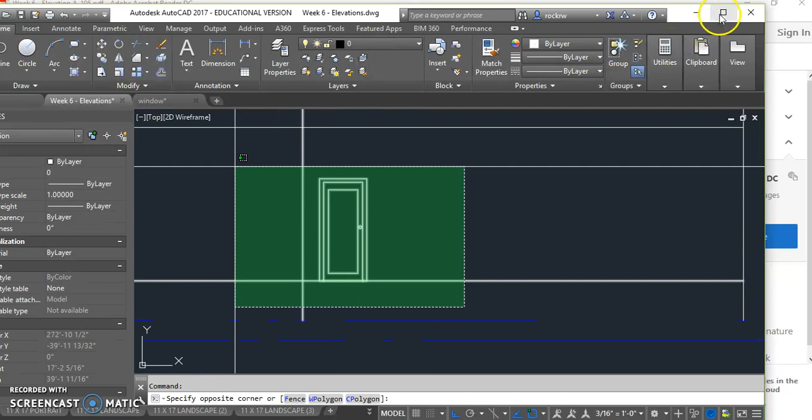I might copy my first floor line down 6 inches, and then another 1.5 inches for decking, and trim that out of this side.

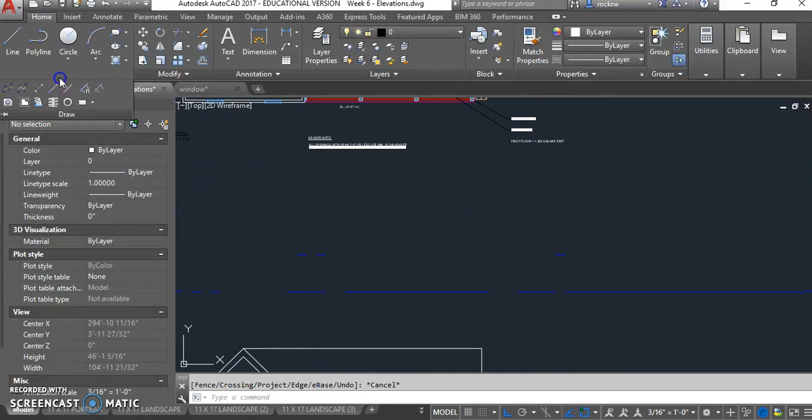Okay, so that's the floor of our porch. Next we would put columns, and we have wood posts here, with a half post at the wall. I'm using construction line again, vertical.

I'm bringing vertical projection lines down from my plan, using trim to trim them out from the first floor. Now where are they? What's the height of these things?

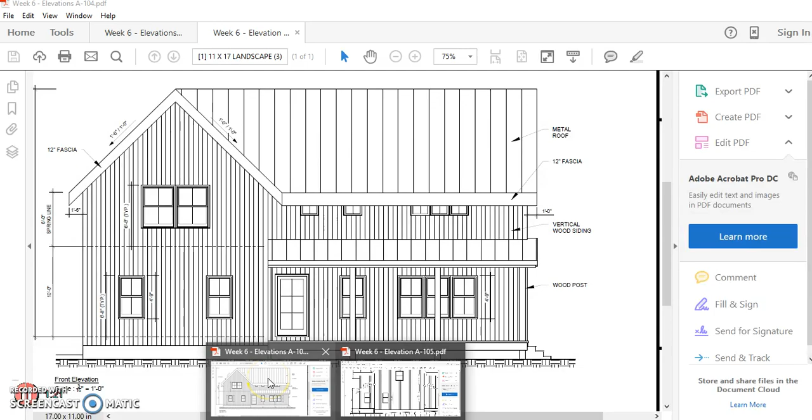If we look at this, we'll have a better idea when we draw the side elevation, but for starters, from the porch floor to the bottom of the beam is 8'2". So back here, I might take the porch floor, copy this up 8'2", which is also 98 inches.

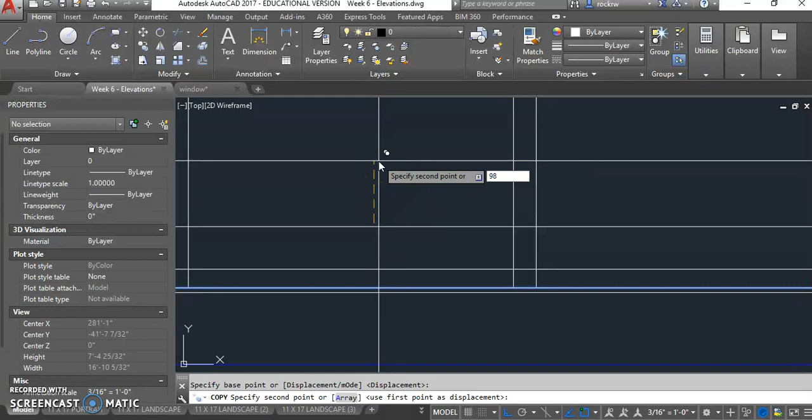Then I'm going to use that line to trim the post out on top. I'm going to get rid of this line so it doesn't confuse me.

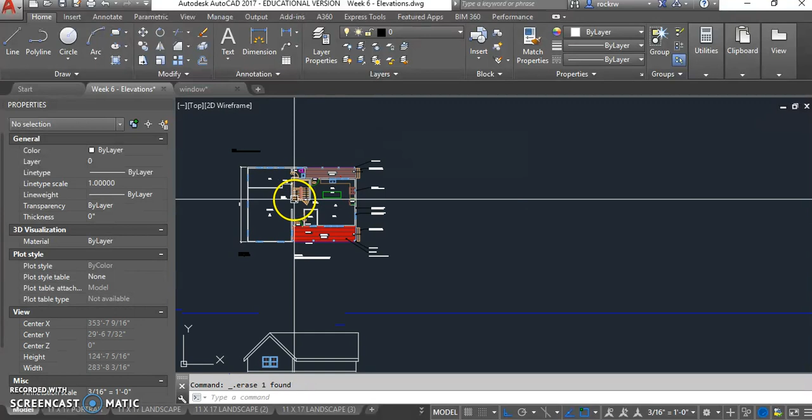Now I'm going to jump over to the other elevation, this one, and draw it from this side. I'm going to copy the first floor plan over and rotate it so the kitchen is facing down the page. This is the elevation we're drawing, so we're going to stand here and look at the house that way.

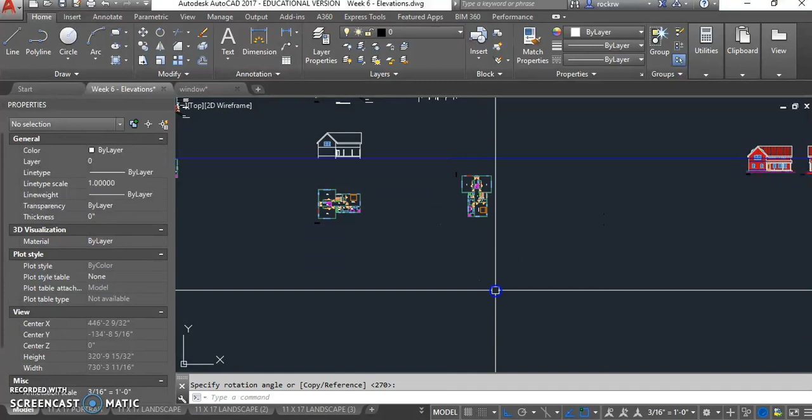We'll copy the second floor and rotate it, not sure if I got all of that. That's a clockwise 90 degree rotation. Then, of course, we align them.

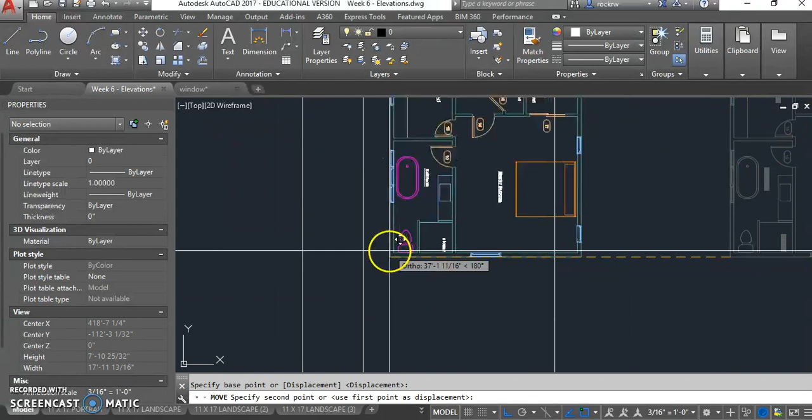I'm using vertical construction line here, same exercise as before. I'm picking the corners of the building to use and ensure that these plans are aligned. Now I'm moving this one over, and I have enough room to draw this in here.

Looking at this elevation, drawing this one, we already have a good deal of information done and set up. We have all the horizontal lines, the roof peak, the drip edge line, and probably some other things we can grab.

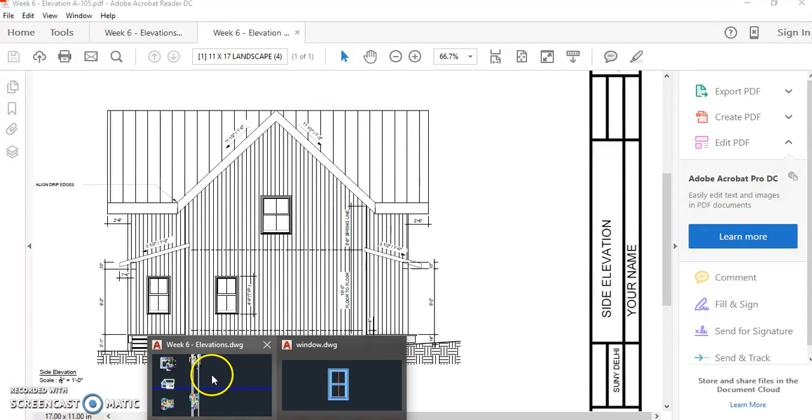So let's try and sort out this roof here. I'm trying to draw the roofs first. What am I going to do? Let's see, maybe I'll grab this, because these are the same lines. So I'm just going to copy this roof over to here.

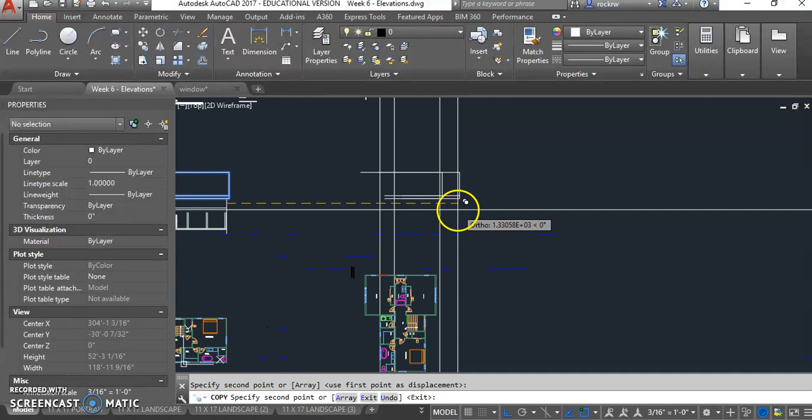But that's not actually where that roof starts. That roof in the back goes from here to here. The ridge runs this way on this section of the house.

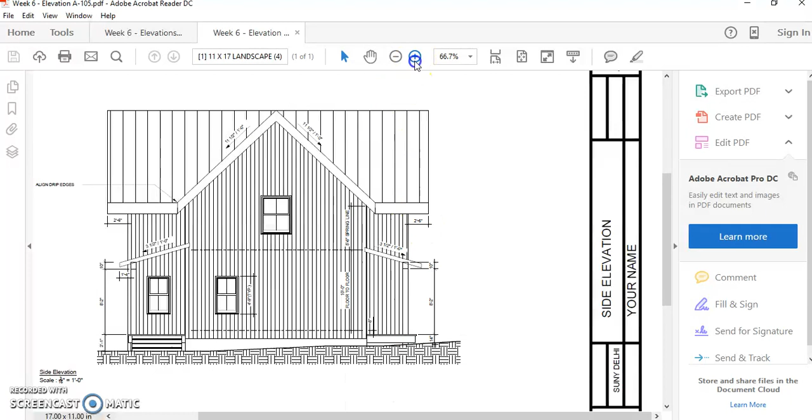Let's see what the overhang is. Looking at a big overhang, 30 inches, 2'6" here, 2'6" here. So this is the wall beyond, the wide part of the house.

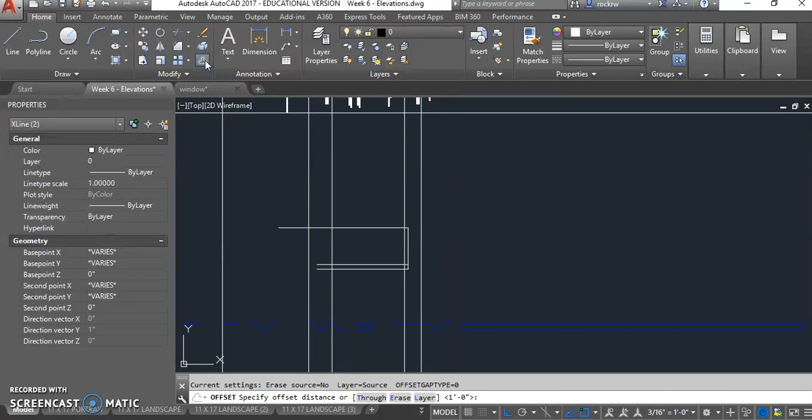So let's go back here. This is that wall, and this is that wall, representing the wider part of the 2-story. I'm going to offset those 30 inches, one goes this way towards the outside. So what I'm setting up is the edge of my roof. There it is.

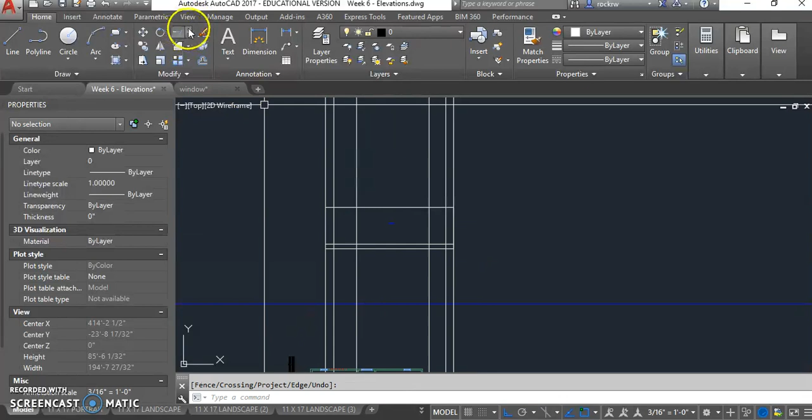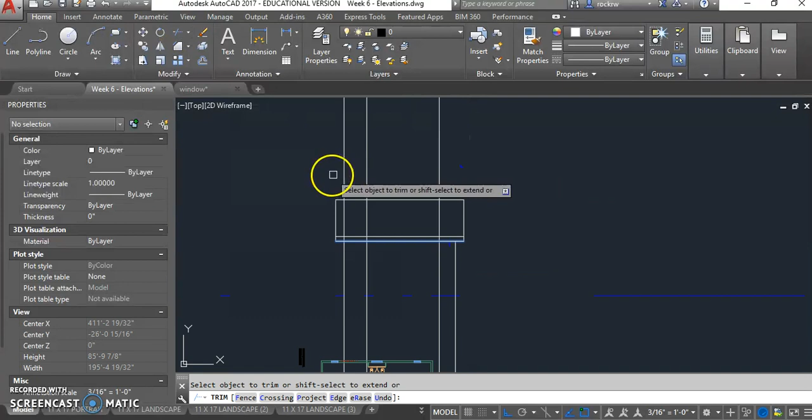So I'm going to use extend, then trim. Here we go, so I'm going to trim this. This is the wall of the back section of the house, this is the wall of the front section. I might trim this like this, so the roof is going to go here.

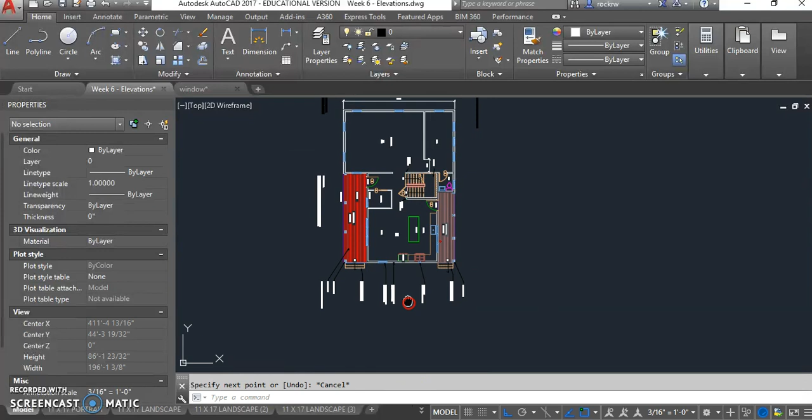We know that it's an 11.5 pitch, and I'm drawing a center line across this part of the house, right here. What do I know about this roof? That this roof goes to the top of this roof, right? They align, and so does the drip edge.

Now I want the overhang. What's the overhang distance here? Let's say this is a foot, it looks like about a foot.

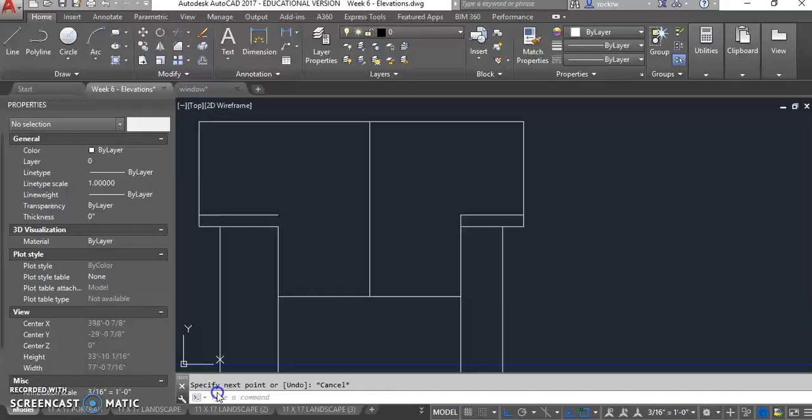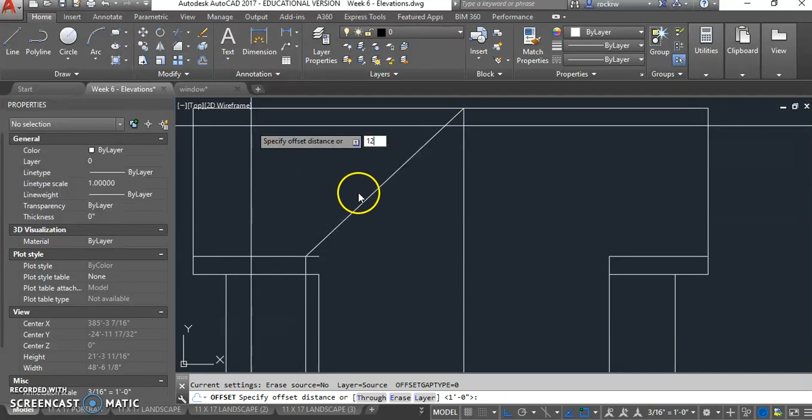Going back to the elevation, I'm going to offset this wall line 1 foot, and bring this up to the drip edge. So there's essentially where the valley happens, and there's the peak. I'm going to offset that 12 inches, and now we start to see the shape of this roof take place.

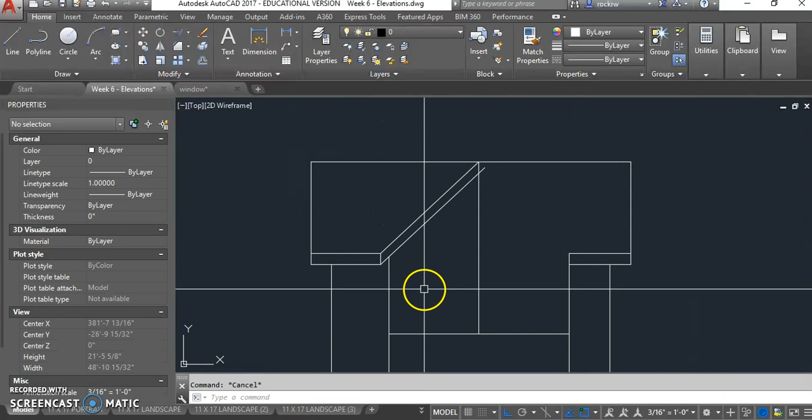This wall will come up to meet the rafter, and this line gets pulled back, so that's that condition right there. You'll see that I drew a center line. I'm a fan of symmetry and mirroring things in the spirit of saving time.

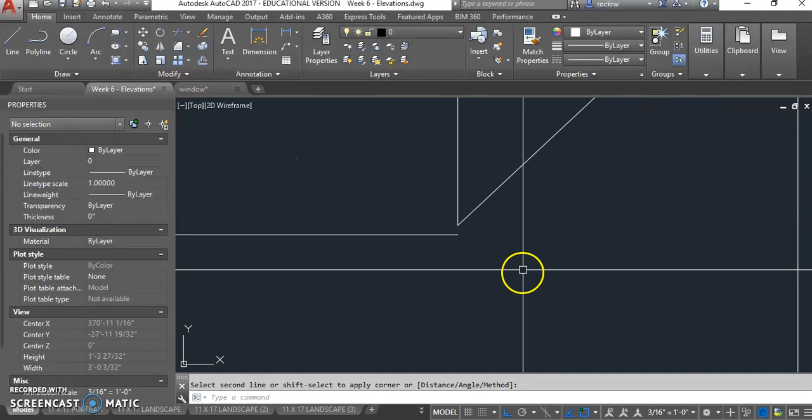There's that, we have a little line maintenance to do over here. This will come back. So one thing, if you see this gap here, that could cause problems while hatching. I'm just going to make sure this is closed up. This could cause undesirable hatch effects, so we want all these boundaries to be cleaned up, cleared up.

All right, so here it is, that's the shape of the house. My grade line, I'm going to trim this out of here.

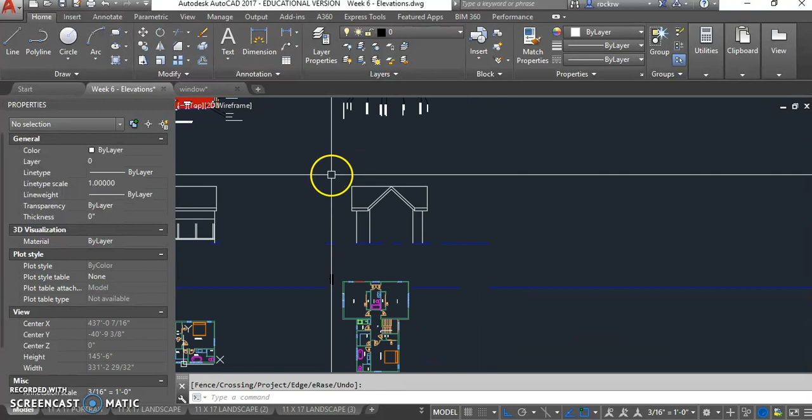Next up, you'll do the same exercise for the windows, but then we have the porches. Here's the porch floor from the other elevation, so I'll just copy that over. Each time, see what you can copy or use that you've already drawn.

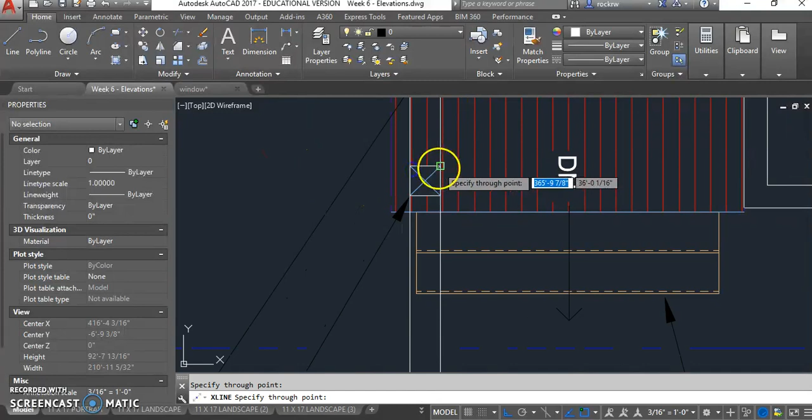Right, there's the porch floor. Now maybe we'll bring down a post, right there. We set the height at 8'2", top of the post over here. So I'll just use a line from there.

Right, here's my post. So this exercise is simply projecting lines horizontally and vertically to get the shape that you want.

So we have a header on top of there that supports these rafters. It's a 10-inch beam or header. Then we got a 3.5 pitch roof, 16-inch overhang. This is what I'm going to work on now.

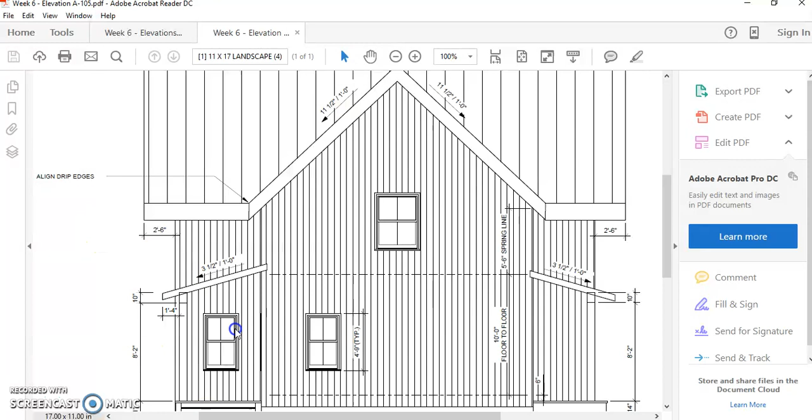So from here, I'm going to put the beam a half inch over the post, whether it's trimmed out in wood or whatever. We like to cover the posts with the beam, keep water out of the top of the post, and it's a nice look, in my opinion.

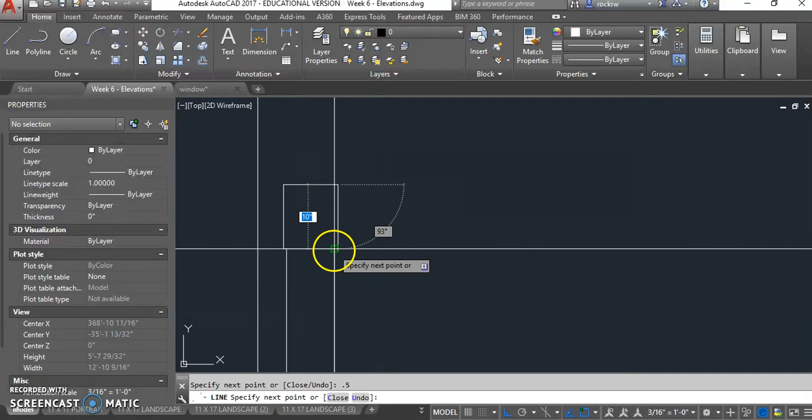So there it is, 10 inches tall. We have a 16-inch overhang. So I'm just going to start a line and go out 16 and draw a line vertically up. This line represents my fascia board.

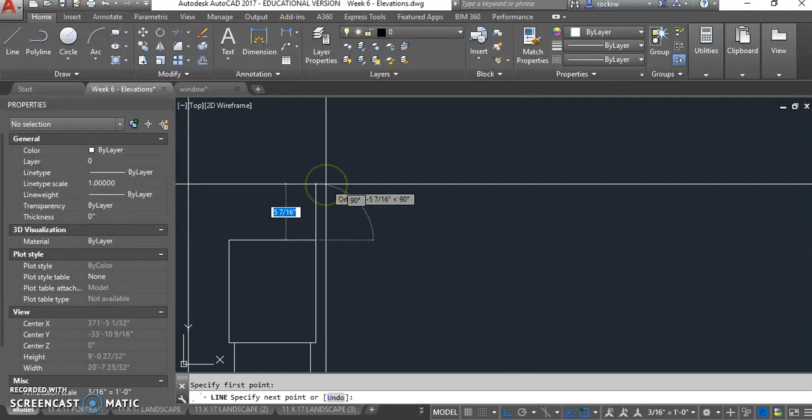Rafter's probably going to start here. So how I get that slope is I'm going to go up 3.5 inches over 12 inches. Oop, I missed it a little bit. And then there's my slope triangle, right? That gives me the angle of the roof.

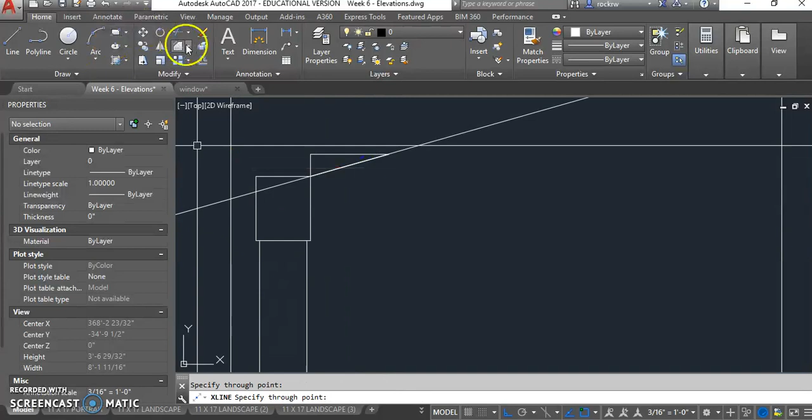I'm going to use a construction line now, 2 clicks, anywhere along there. Now I'm done with this. I could use this as an annotation up here and write 3.5 and 12. We'll come back to that later.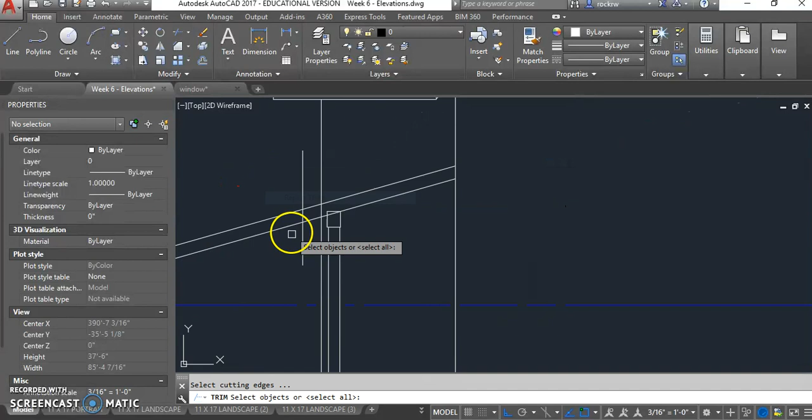So I'm going to use 8 inches for this rafter, porch rafter. I'll trim it out of the house. We know this is the fascia, so I'll trim it out of there. There it is.

I didn't have to really redo that. A little bit of line maintenance here. So that looks about right.

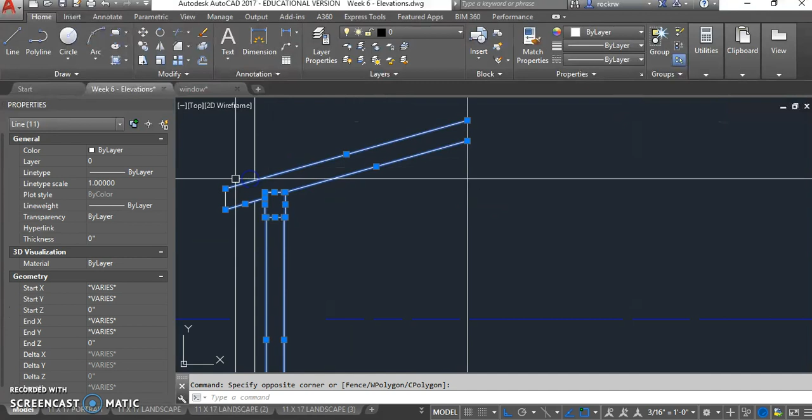There's the porch roof. Wouldn't be far off probably to take this whole assembly, mirror it to the other side, and see what you get. I'm not sure if it's an exact matchup, but let's see.

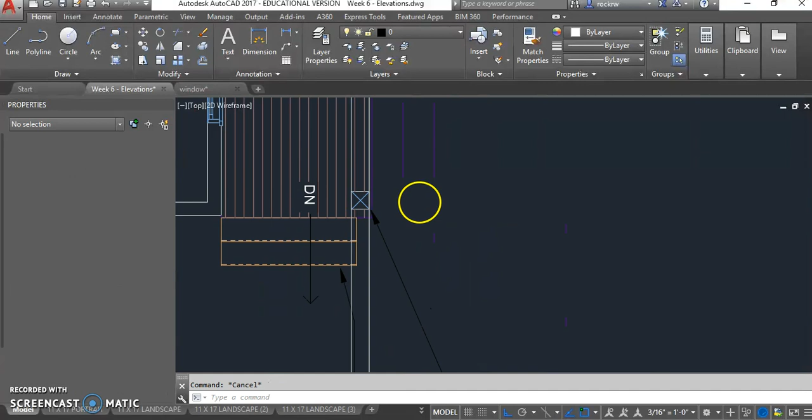So I'm constantly looking for ways to save time, using mirror and things like that. So this is probably pretty close.

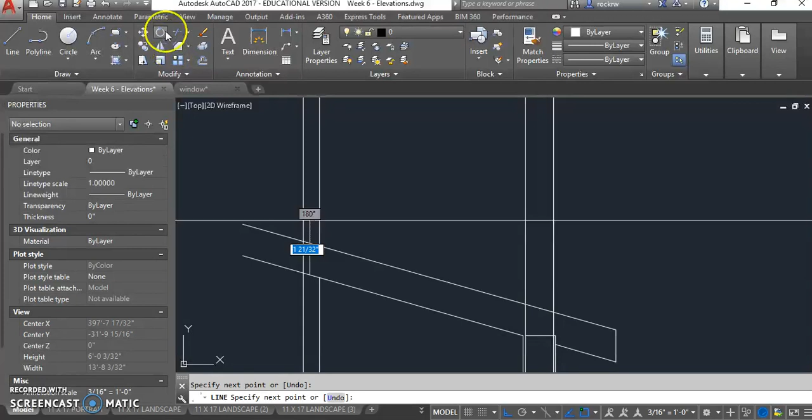I'll check a few more of these parameters. You can see from my drawing I'm showing an overhang here of a few inches where the return kind of comes back on the house. In reality, I don't think they built it like that, but I usually do that when building.

Alright, so there's the shape of this house. You'll add windows and everything like that.

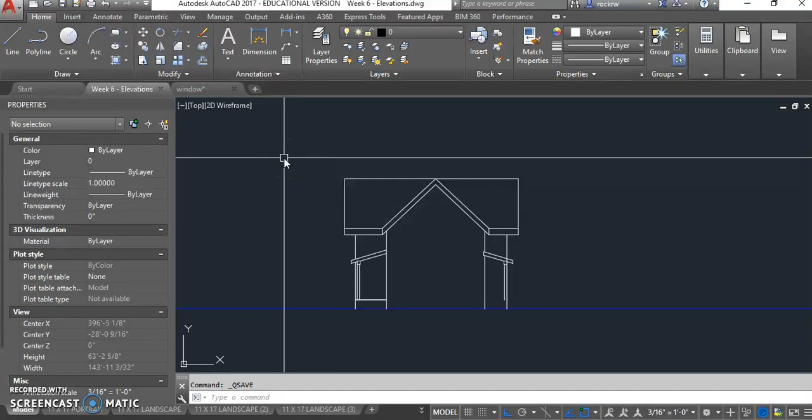So hatches. Always save your CAD drawing before we hatch. I'm going to first go to the hatch layer.

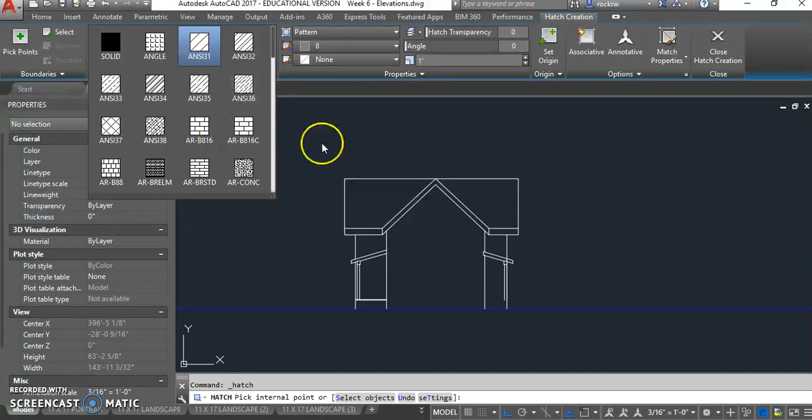Here's the hatch button. Now on the last page of your assignment from Vanco Hall, I've given you all the patterns, scales, and angles that you need to do this. For the roof, it's a standing seam metal roof.

I'm going to use this user-defined pattern. The standing seam metal roof we did here, I think was about 20 inches, so you'll set the scale here. This now means the lines are 20 inches apart, and the angle is 90 degrees, so these are vertical.

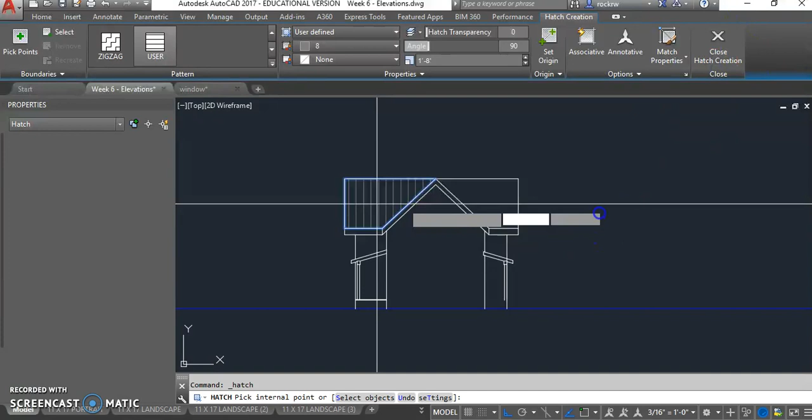So I'm clicking in the hatch region, and my AutoCAD immediately freezes, which is why I recommend saving first. So my hatches should be red.

It's on the wrong layer, so we'll put it to the hatch layer. Go to the hatch layer. And we always want this to say by layer.

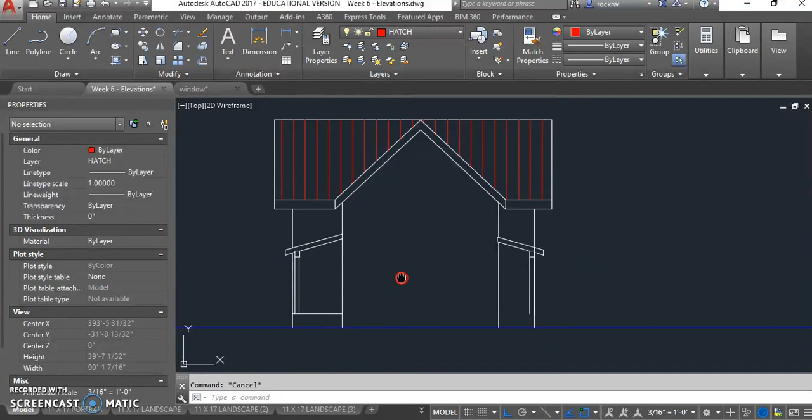Same exercise for the walls. That's a 6-inch vertical siding. And then you have the grade.

So now we come down here. You have your drawing from a week before, the floor plan. This touches on the video I just put up for last week, making a new tab.

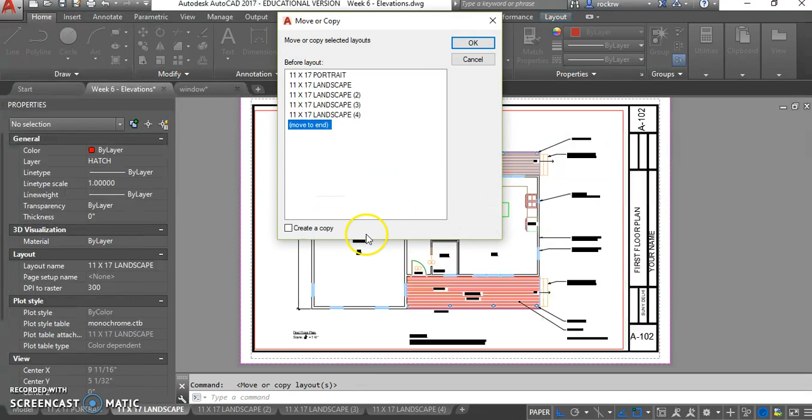I'm going to go down here, right click, and say move or copy, move to end, and create a copy. So it copies this entire layout over. Let's try that again. Right click, move or copy, create a copy, move to end.

This should be now landscape 6. Oh, and it's collapsed itself. I have too many, so I could rename this, right click and rename this front elevation, or A whatever it is, A5, A105, so I know.

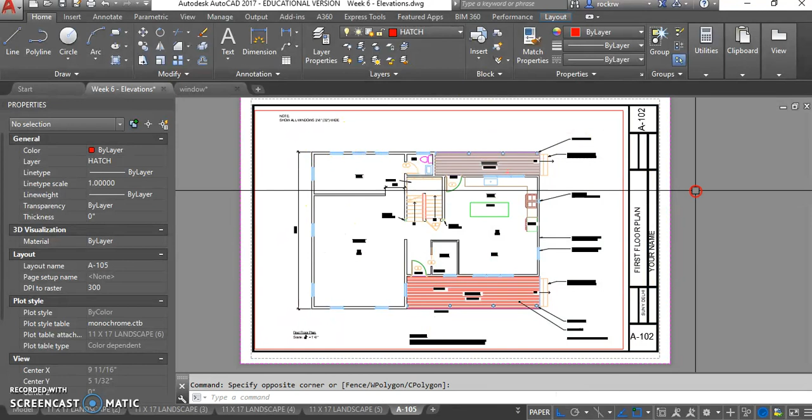Now I got to get the elevation in this viewport. Back here, let's see if this is locked first. So I'll click on the viewport, which is this red box. It's locked. I'm going to unlock it.

Here, this tab tells me I'm in paper space. I click it to go into model space. I'm going to zoom out, find the elevation that I want to frame for this sheet, get it pretty zoomed up. Then I click paper space. It gets me out of model.

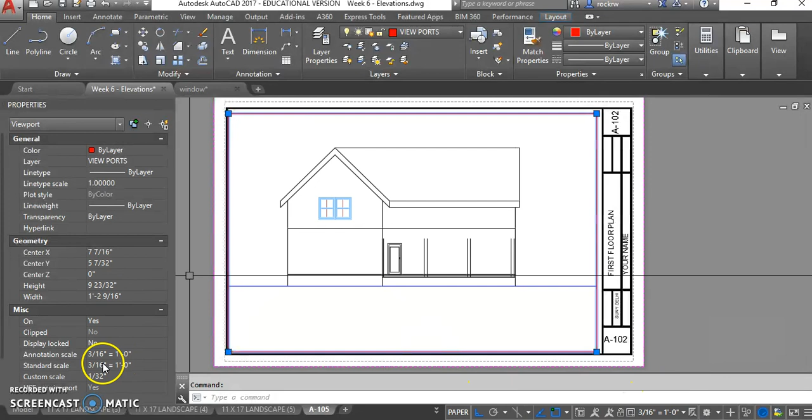We'll set the right settings for annotation and plotting. I'm looking over here, looking over here. Everything is good. I'm going to lock this. Now this is ready for printing.